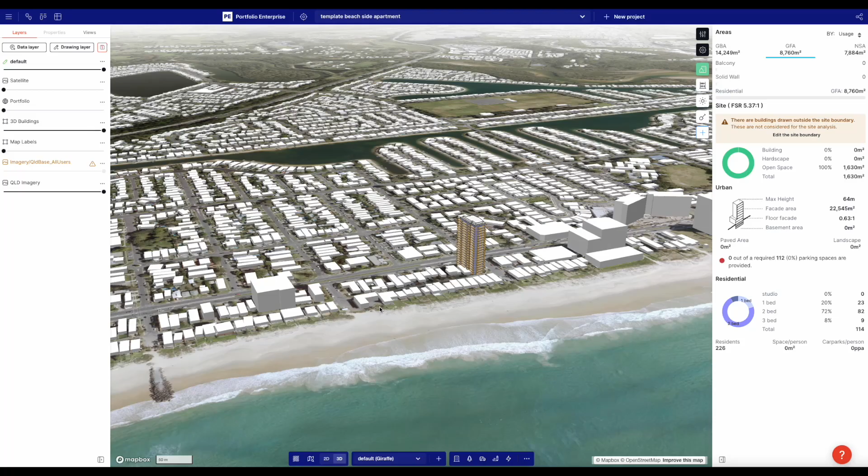Hey guys, I am up here on the Gold Coast and I'm building some kind of classic Gold Coast style apartments. And I built this whole flow, which is a relatively simple one.

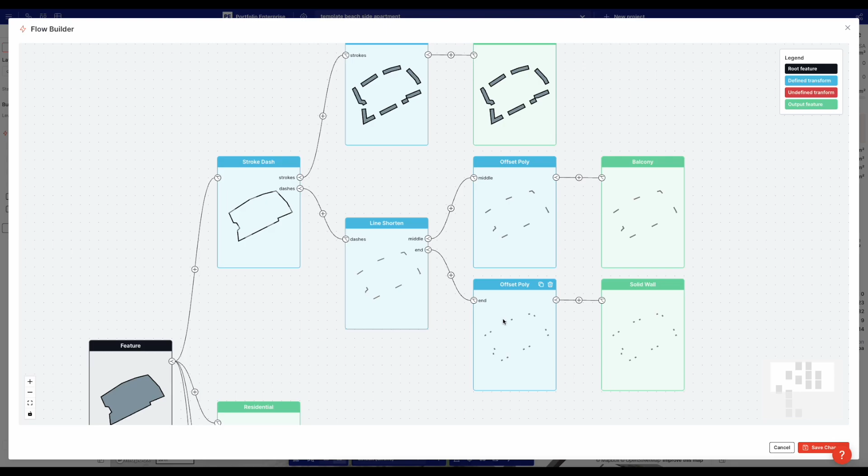You take the feature, do some stroke dash, make the nice big balconies. They're sticking out 2.1 meters. Take the dashes and offset them, shorten them to create the middle section, offset it a bit, and then offset those side bits.

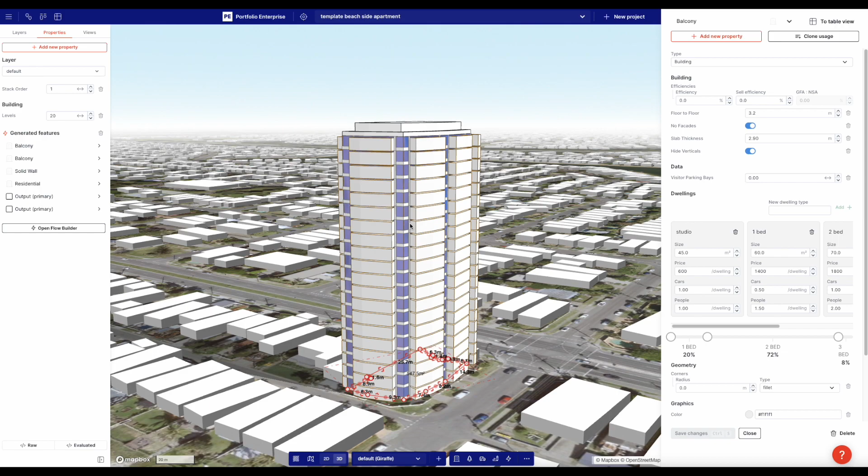And the reason this looks so good, it doesn't look like a normal Giraffe model, is because we've added a couple of new features. We've got a slab thickness parameter, so I can change it - if we make this guy really tall, 2.8, I can make these balconies any height I want because I can parametrically change the slab thickness.

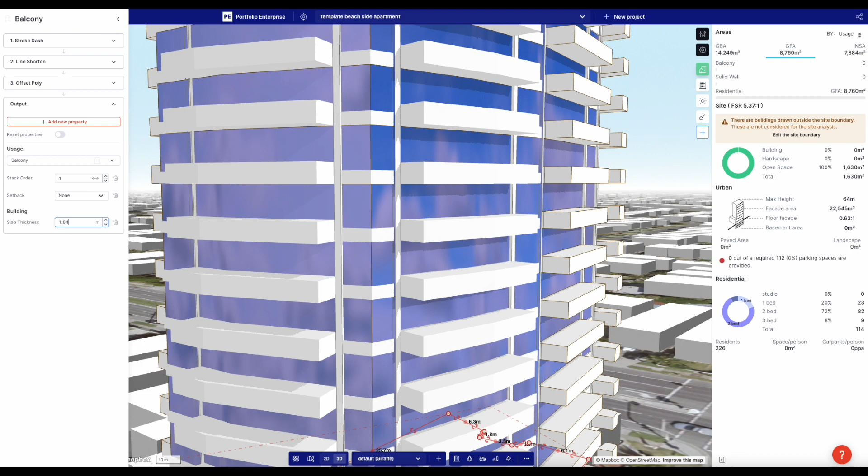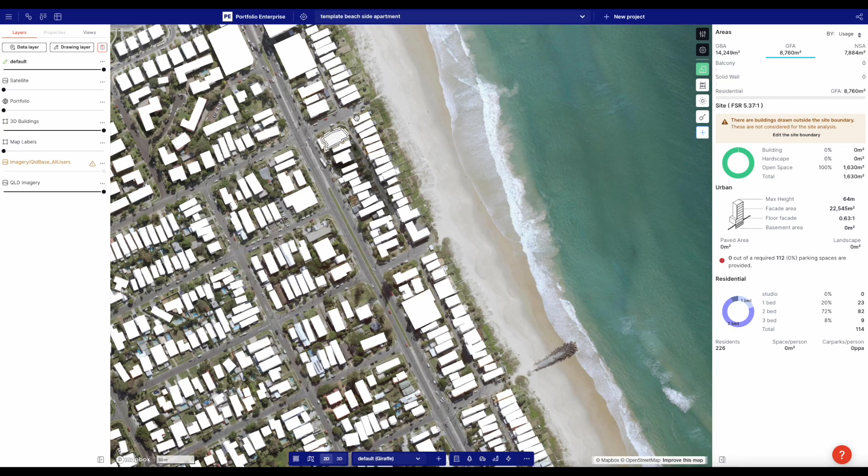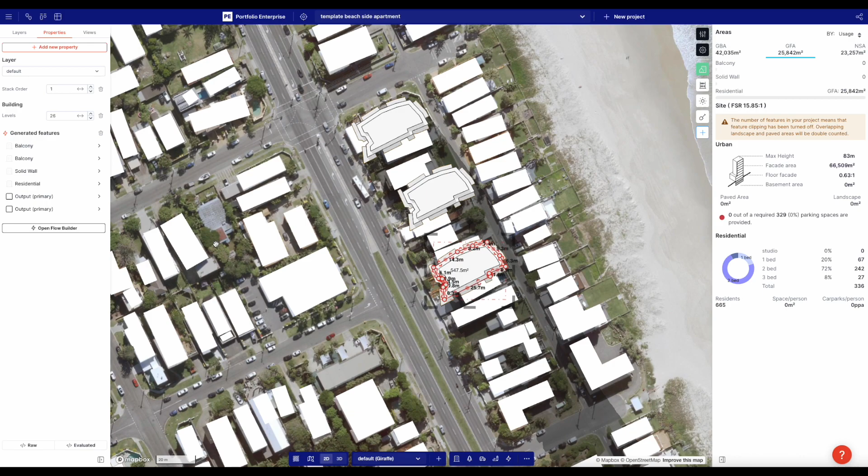So what I'm going to do now is speak a bit to the grammar of these buildings. This is going to be one of these sort of beachside apartment packs. So maybe I'll make this the small one, this the tall one, this one a slightly taller one, and then one more. You'll notice often in the Gold Coast or beachside areas there's these little families, like the developer gets a really big site and does three buildings.

And what I noticed was just this grammar here of this kind of offset logic - when you pull these corners tight, you get these nice extended, spiky triangles, which are really cool.

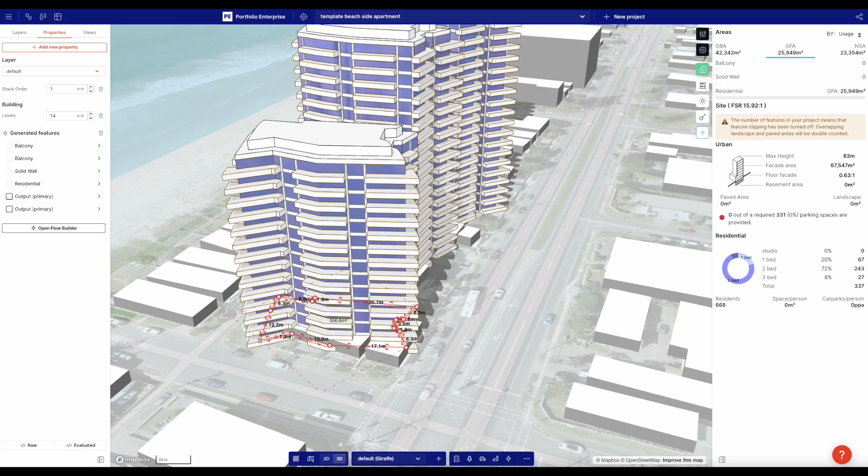And what I want to show here is the fun of designing with these tools in Giraffe. So this is the same definition now, and we've got these buildings of not markedly different character, but at least different character. So this guy's going to be the low level spiky guys who will cantilever more - we're not going to go up that high. And to give these apartments greater amenity, we'll spike them up.

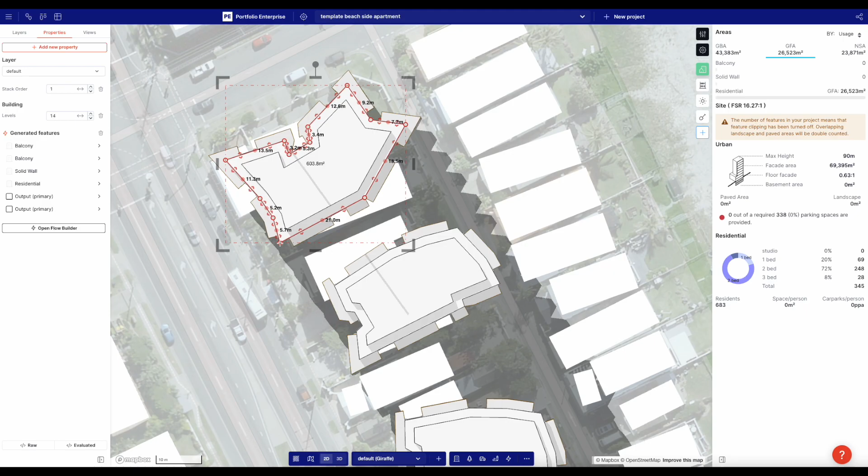What I need to do is change the length of this line to ensure that the dashes come on the edge. All right, so I'm happy with that. Okay, so there's the spiky guy.

Now I'm getting some sort of stack order error there, which is all too common human error. And there we go, it's gone. All right, so that's a pretty cool looking building.

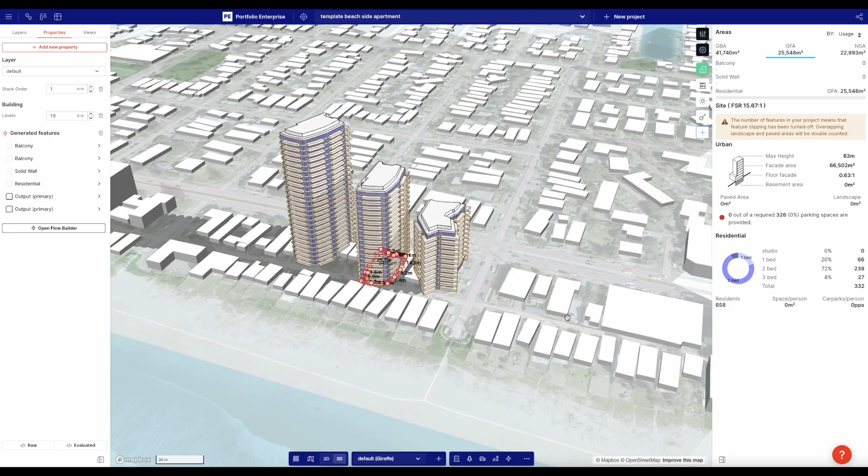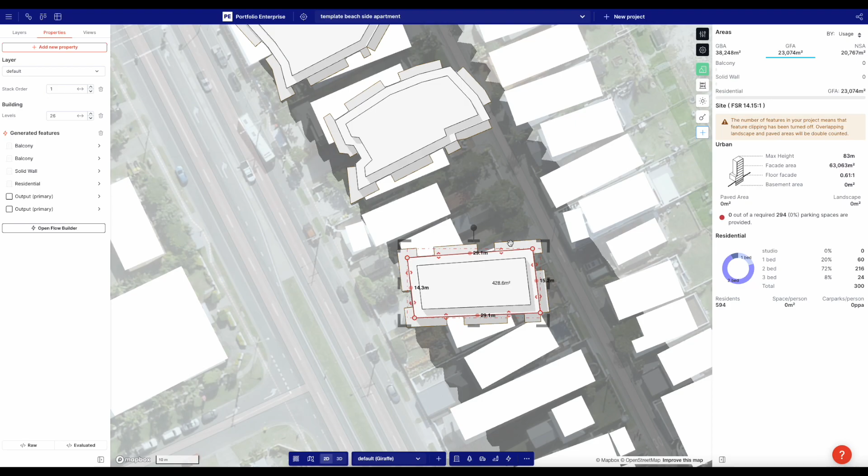Now this guy I'll leave - this is an actual tracing of the building that I've done. Then what I'm going to do is try to see how this thing works formally, in what kind of form it generates when I make a kind of round boy. And this round boy that I'm going to make, I may actually round it by algorithm. So there's a very simple, straightforward, non-articulated building. But if I open the flow builder...

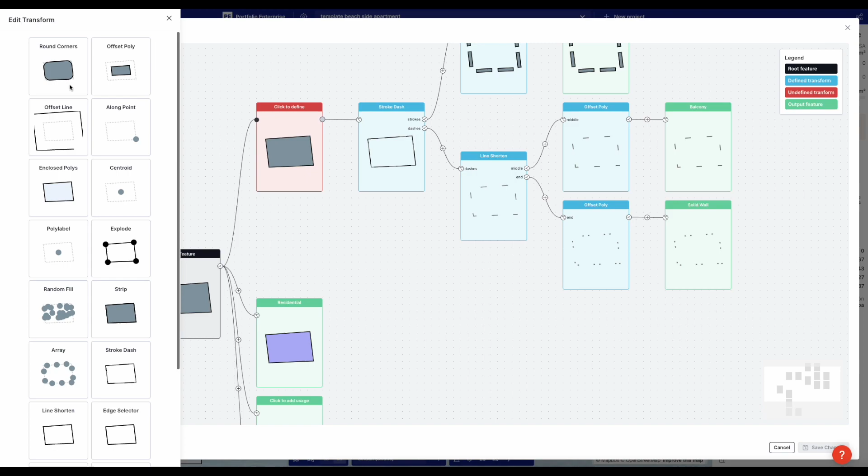A little bit annoying, but we'll have to do it. Round corners, we'll round them 10 meters. Actually, that's maybe too many, 7 meters. That's good. Okay, so we have to do this for everyone, which is really annoying, but we're working on it.

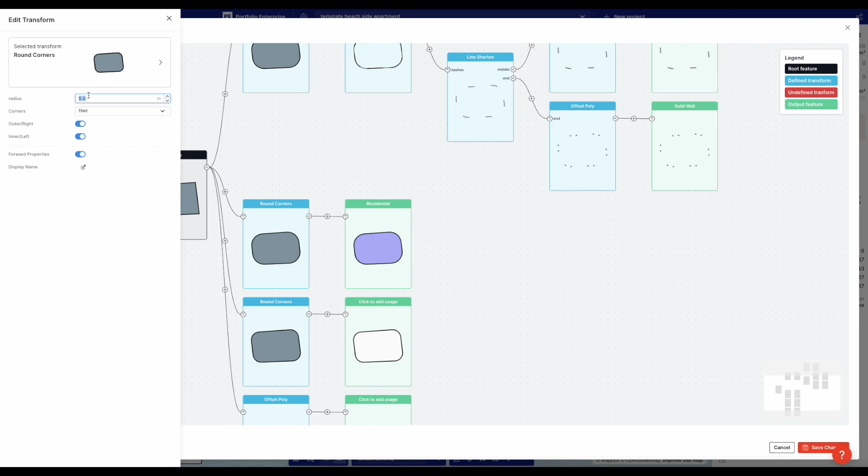Round 7, and the final guy - we need to add that round 7. Okay, save changes. Cool, that actually looks really good. All right, so we've got this kind of round grammar, and that carries through. This offset logic doesn't hurt it, and I'm just trying to get it more bullet shaped.

All right, and this polygon is 600 square meters. It's not a very large tower, so we could probably stretch this guy out - let's say to an 800 square meter tower. That's probably more like it. And I can even push it further there.

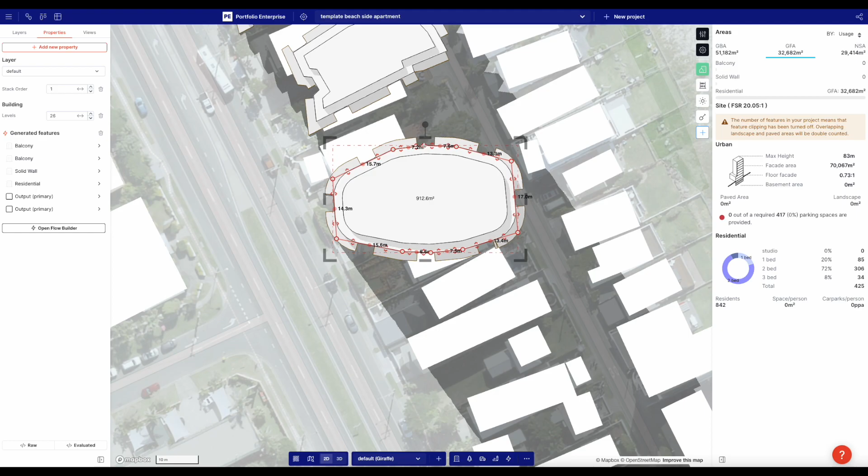So we have this family of towers now, using exactly the same flow, literally changing nothing but the polygon.

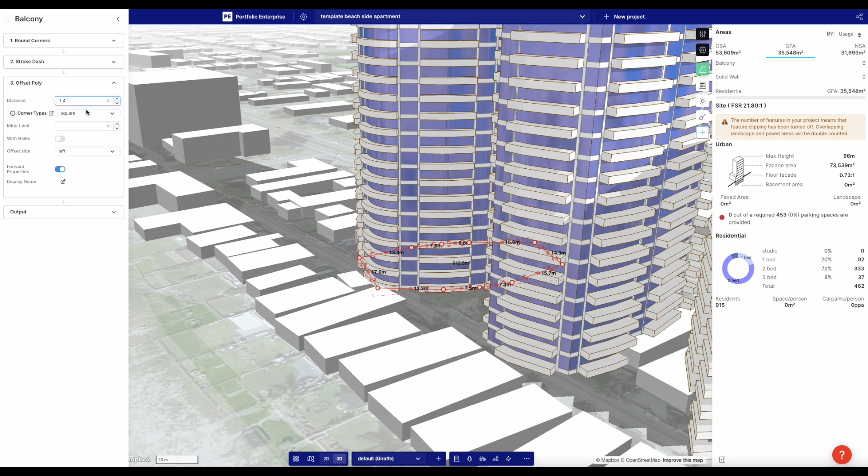Of course, we could and probably should change some of this. What we could do here is pull the balconies in a bit instead of them being so large. These do seem a little large, so let's pull those guys in. So offset them by 1.4.

And maybe you'd actually grow these guys, offset them. So now you can change the parameters as well. But something very, very nice about this.

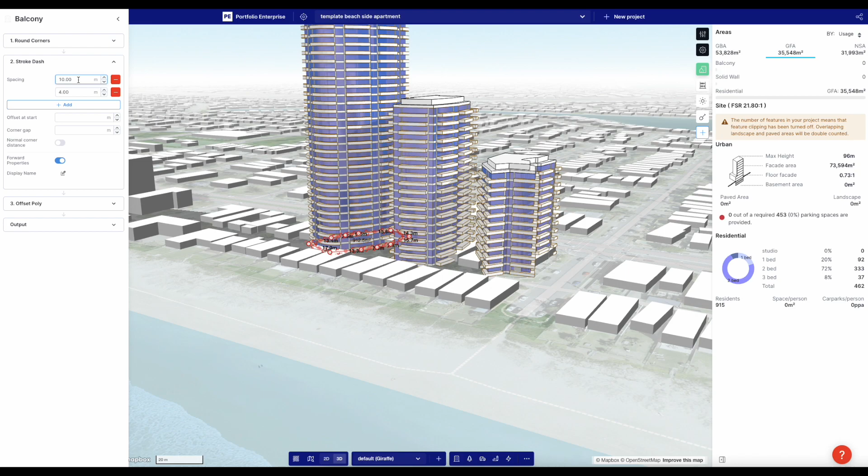Probably a more substantial change would be the stroke dash. So instead of 10.4, we could go 6.2, like double the number of balconies. But there's something very beachy about that huge 10-meter balcony that you don't want to lose. Maybe we can go 12.3. There you go.

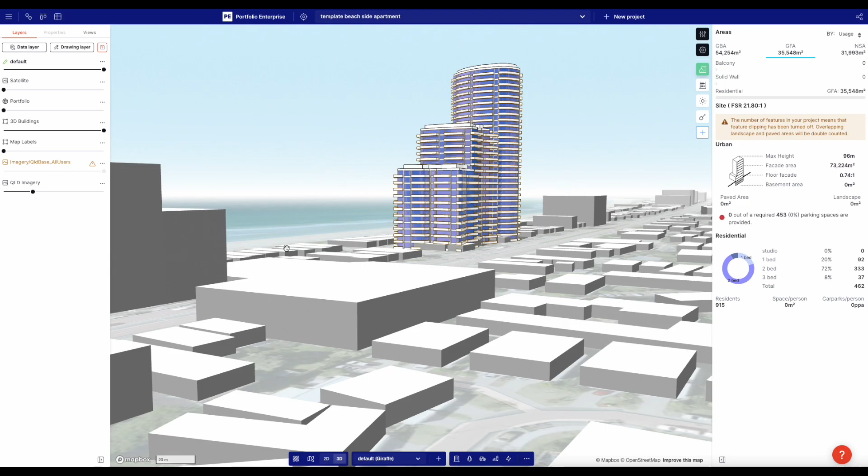It's a handsome development. Let's try and build this building here. So there's this inside building, there's like a glass, simple building, and then these balconies on the outside.

Now these balconies are varying depths. You can see it swerves in and out, which is a lovely effect, which I'm not going to try and replicate. I'm going to do the poor man's version of this with a uniform sized balcony all around.

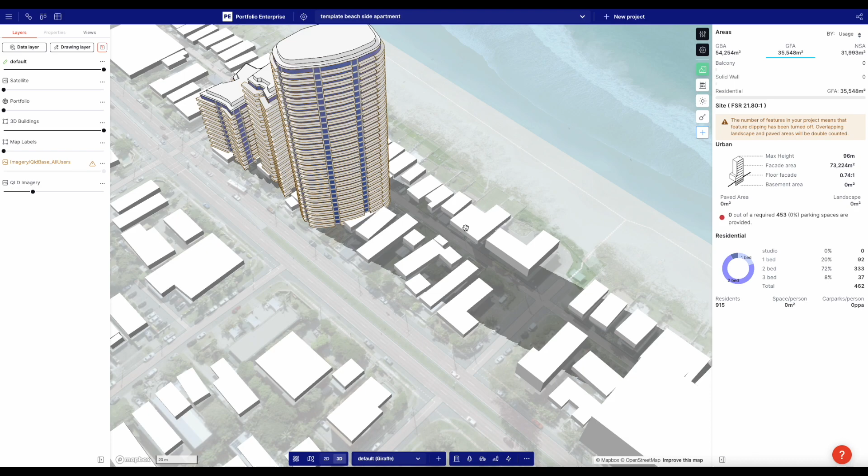So let's start off with a blob. Blobby blob. Open, and we'll round the corners first up. Okay, so we have the corner. And let's make this thing the residential.

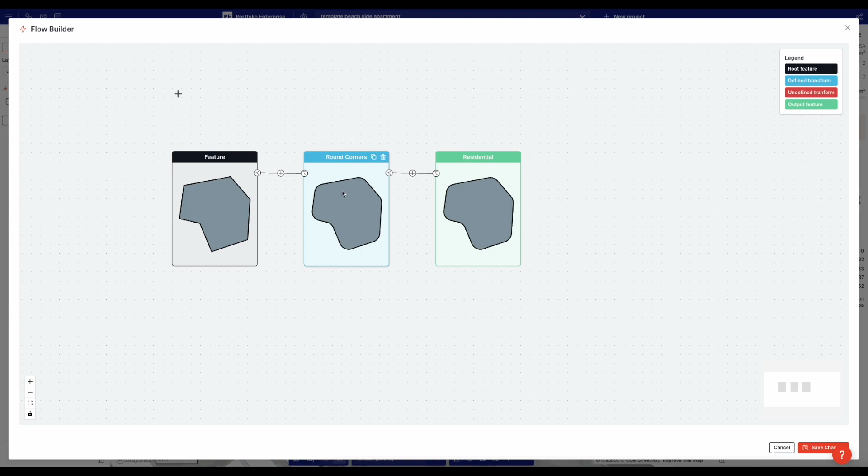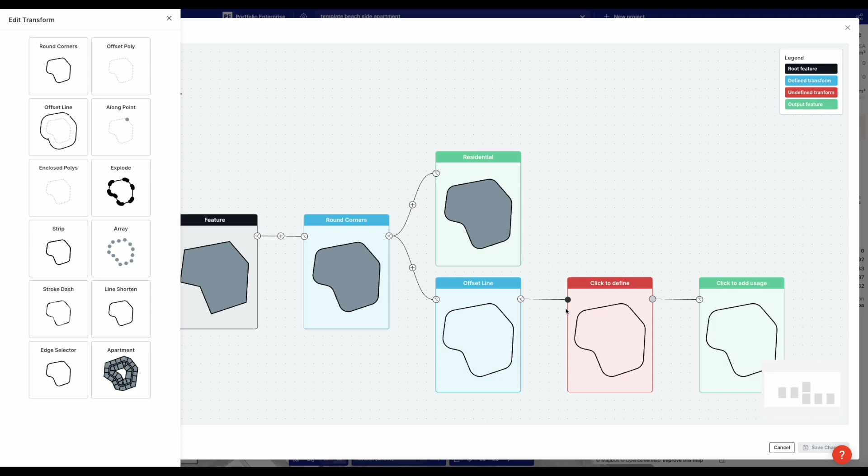And then what we're going to do is take the blob itself, and we're going to construct a base, the balcony, and we're going to do that in the following way. We're going to offset this thing as a line by 1 meter, and then offset that line back to a polygon by 1 meter on both sides.

Then we're just going to add balcony, and we're going to add slab thickness of 0.35. That's fine. Okay, so we've got the balcony, we've got the residential, and we're going to save and see what we have wrought.

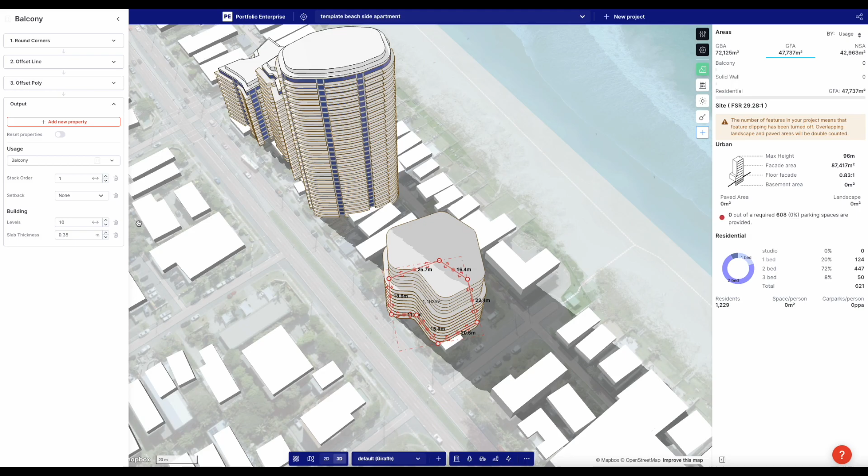Now there's no levels, so if I add a levels parameter, yep, and then we just need to kill the levels on the balcony. Okay, so we've got that. We've got the first thing.

So we've got the residential, let's override the color, make it that sort of dark blue. Oof, that's cool, I actually like that.

And we're probably going to offset this guy by 1.5 and offset that guy by 1.5. 1.45, because what we're going to do is we're going to add some mullions on this.

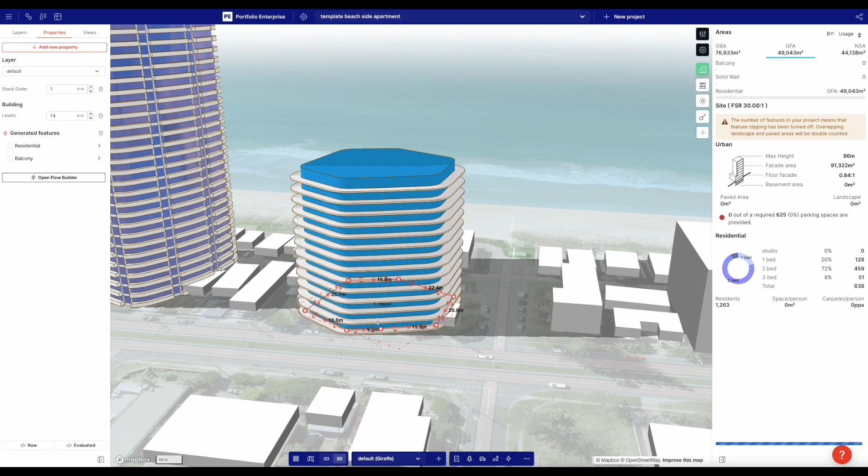Cool. Oh, it's actually very nice. Oh man, that's fun. All right, that's very fun. Fun to play with. It's funny how you get this variation here, just from the angle of the camera and the angle of these lines.

All right, now I need to add this balcony along the outside. So what we're going to do is take this line again, and we're going to offset it by 1.5, and then offset that line by 0.

To a polygon, back to a polygon. We're going to offset it by like 0.1, and then we're going to add balcony to him. We're just hacking this balcony to death. It's doing too much work.

I could add a balustrade usage, but we'd add the slab thickness, and we set him up to 1.2, and let's add a color and make it like this, sort of that, and we'll make it shiny by adding the shiny parameter.

Okay, now we just need to offset this thing to the left. Oh man, looks good. Kill that levels. Okay.

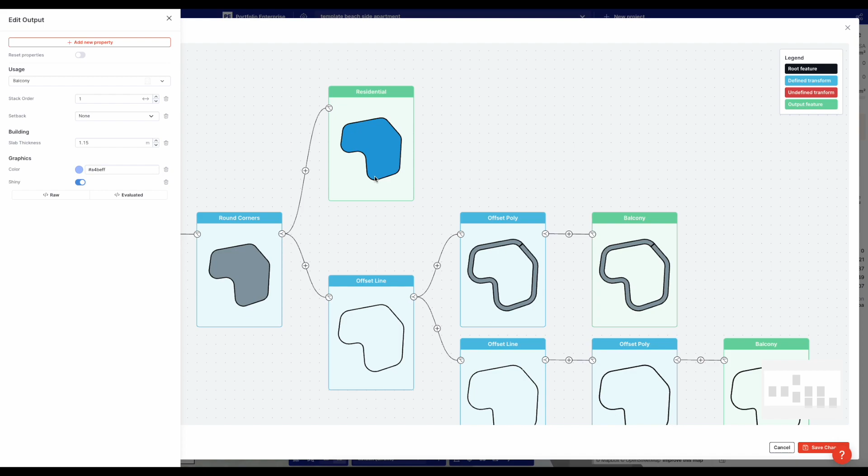And I'm just going to copy that. Which color do we prefer, the dark blue or the light blue? Let's make the residential shiny. Let's see which one we prefer. Shiny makes it darker.

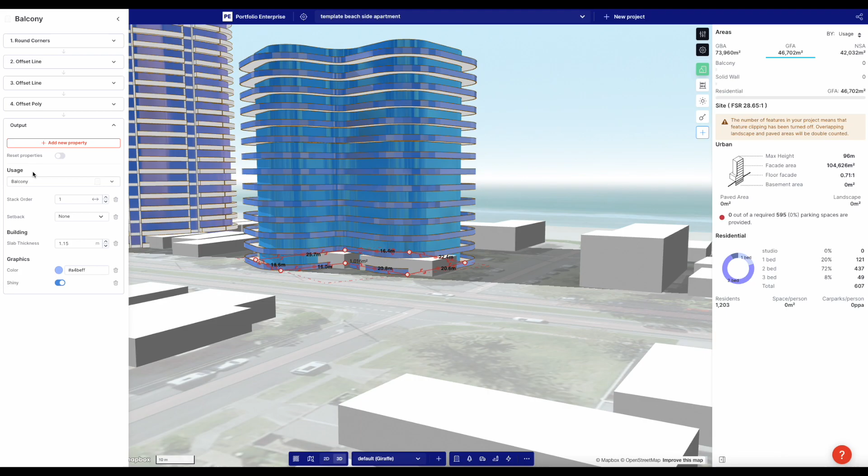Let's get this residential a bit lighter. Yeah, that's good. That is the exact kind of aquamarine 80s jam that I'm going for. Boom, okay, all right, that's cool.

Now this building's slightly too big, so I'm going to unblobify it. There we go.

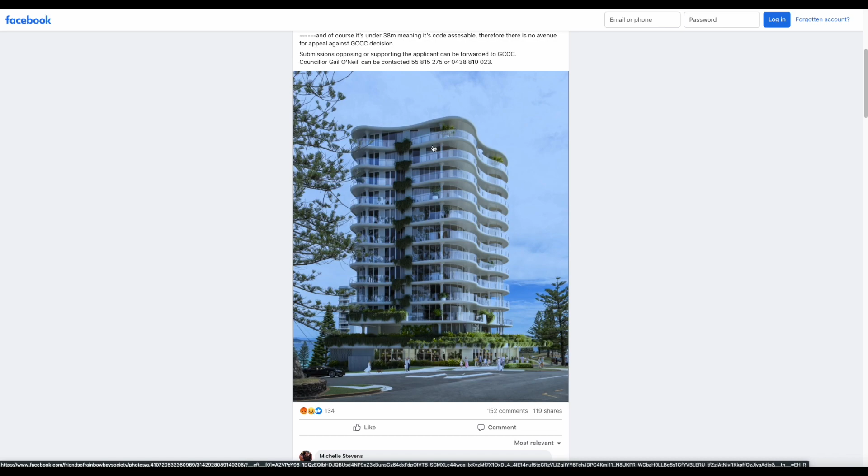Okay, now what I want to do is just add some. If we come back to the, so we've kind of got this. It's not quite—I think these slabs are a bit thicker, so let's do that. Also, they're expressed, so we're missing some of the magic here.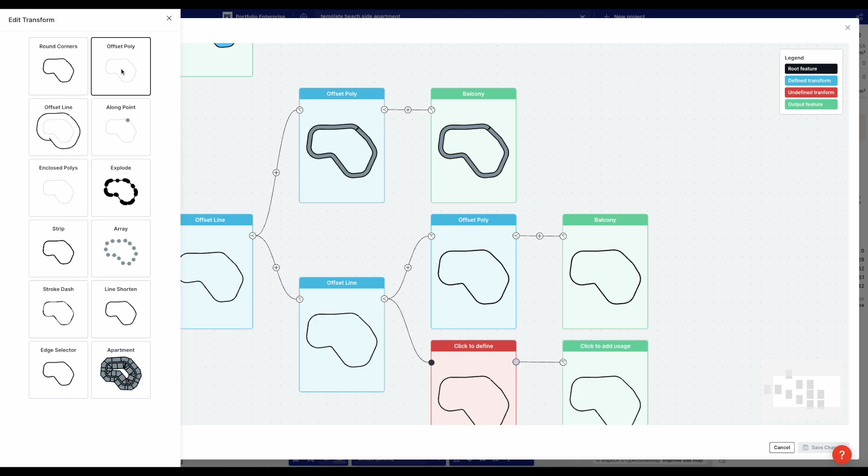So let's add that slab back in. How do we do that? Once more onto the breach. We offset the line 0.2, we offset the polygon 0.1 to the left, and we add the balcony usage.

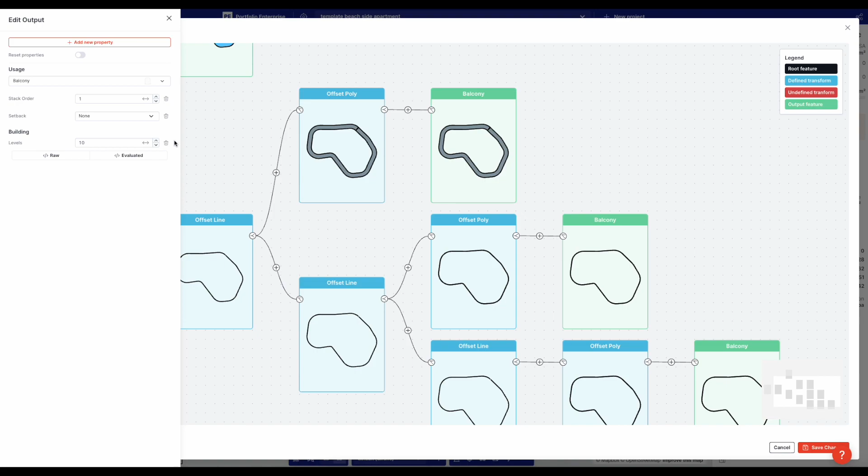And kill the levels and slab thickness. And save.

All right, and now we can see, we should probably go up a little bit. Okay, something like that. Okay, so now you can see what's going on—there's all this like multiple offsets, but at least we're getting this.

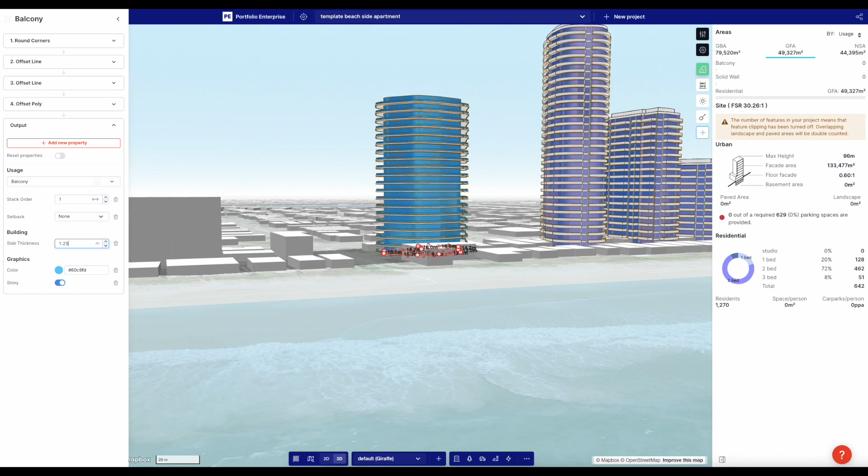Now this balcony, this mid balcony, is probably rendering a bit short, so I'll just do that. And the final thing I'm going to do, well, two things. I'm going to add a roof, so one more big boy on the roof. These buildings always look better with a roof.

And then I'm going to add some mullions on the inner facade, just so it reads a little more clearly.

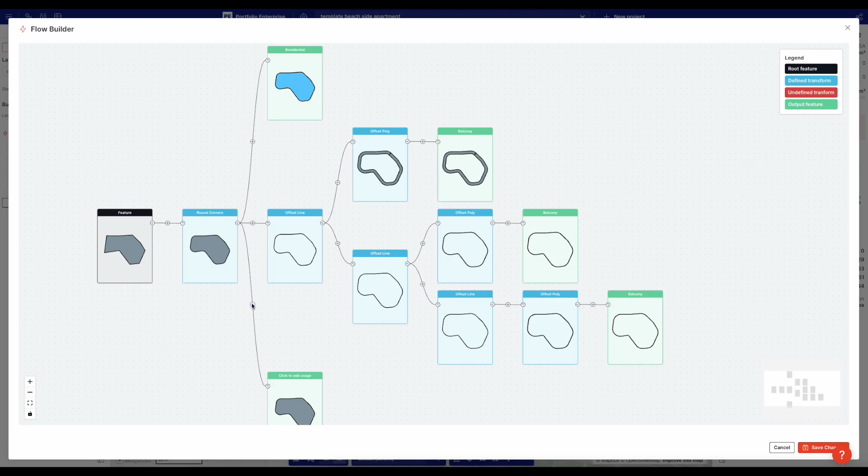So the roof we want is this guy, and we're going to offset him. This offsets out 1.4 on both sides, so that's 2.8. So I'm going to offset this guy by 3 in the positive direction, and then you just add a base height and a force stack.

Sorry, not a base height, just a height. And you just make them like 1, and set his stack order quite high, and then a color, and we want them basically white.

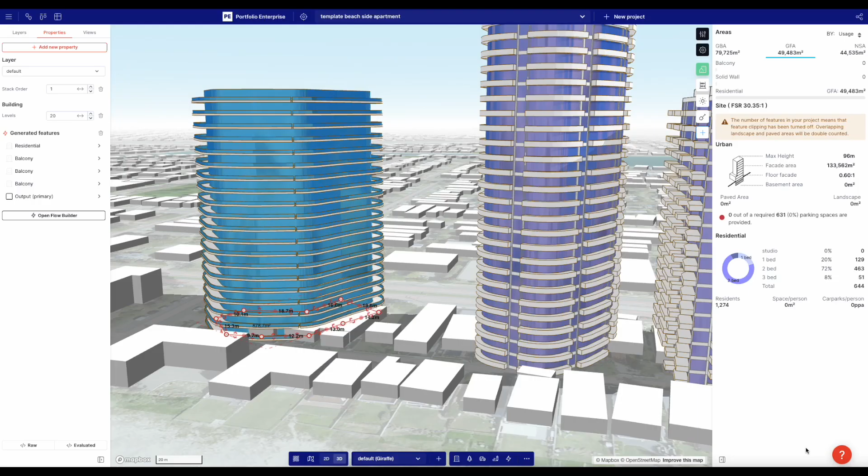Okay, there's that fella on top, and then I normally do it again, so get that guy and offset him in by 5, and then do the same thing. So force stack, color, and height. And this height is more, not 10, but like this is the plant.

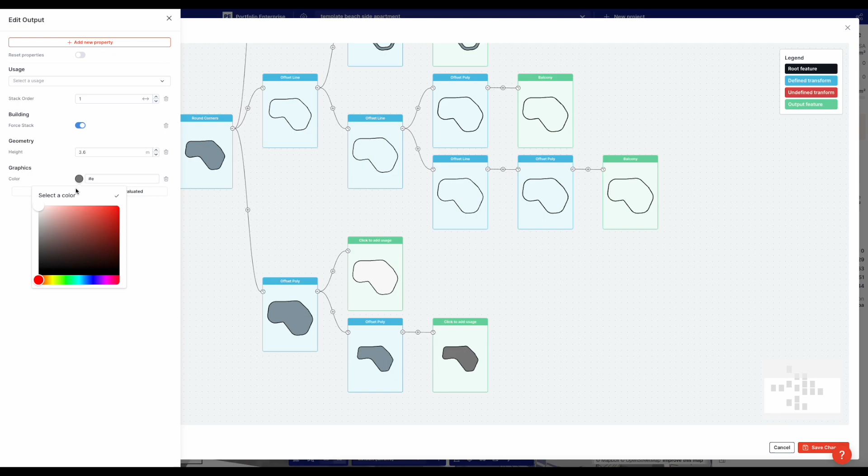And that stack order needs to go right up, yeah, 1000. Cool, okay, so that thing's slightly too tall. Okay, all right, so that's looking good.

And let's just add these mullions now on the round corner. So what we'll do, we'll grab our inner residential, so that's going to be this young friend of ours.

Now we're going to offset line 0.01, and then we're going to stroke dash, and we'll go 4 and 0.2. We're going to grab the dashes, invisible. We're going to offset those polygons 0.2 to the left, and we're going to make them residential.

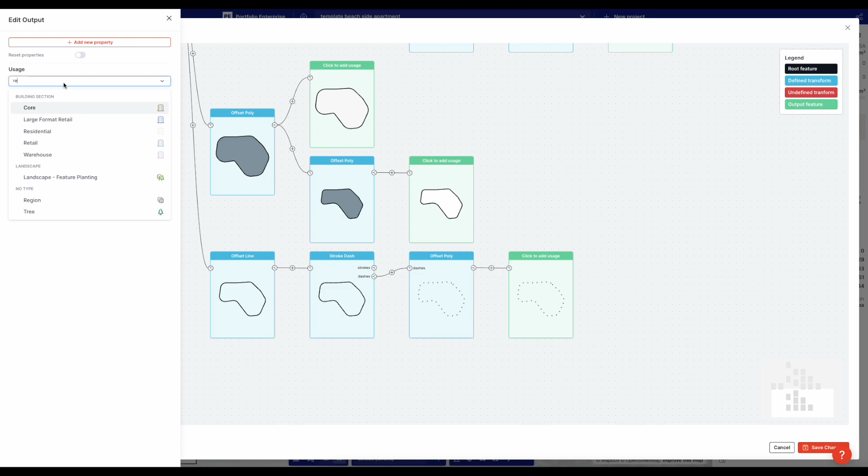Save. Okay, now we just need to figure out where and why. And so what we need to do is, you see, they need a slot in there. So the balcony is making them stack.

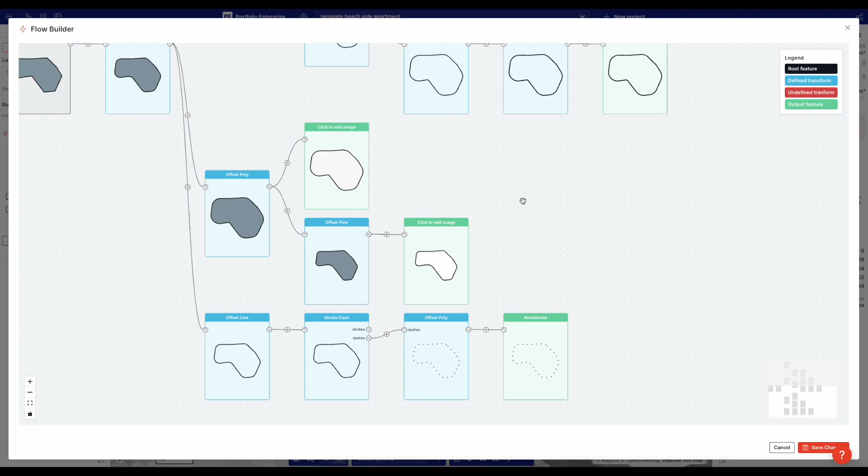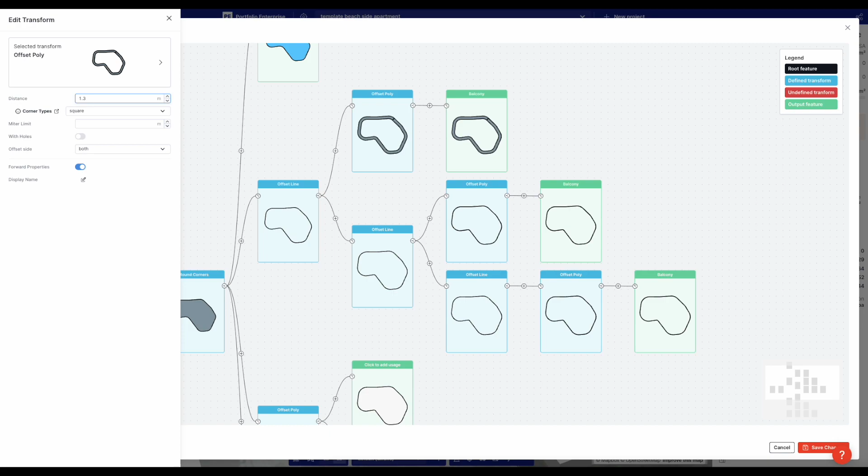Okay, so I just need to find the balcony that we're talking about, which is this balcony. I need to give it a bit more space. So I'll pull that in to 1.3. There we go.

All right, so basically I've just added a bit more space so those residentials can slide down. So it's all chicanery, it's all tricks. But what tricks—what glorious tricks.

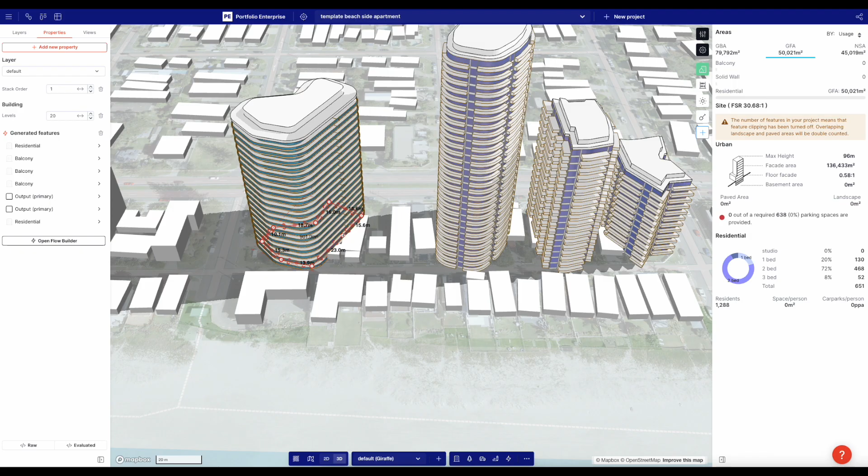You can see it fails on an overly convex corner for some reason, because that stack order trickery fails. But that's kind of good—that's kind of useful, isn't it? I like that, this is a cool template.

I think this is my beachside developer coming to the fore, and I can build these kind of developments up and down the Gold Coast to my heart's content.